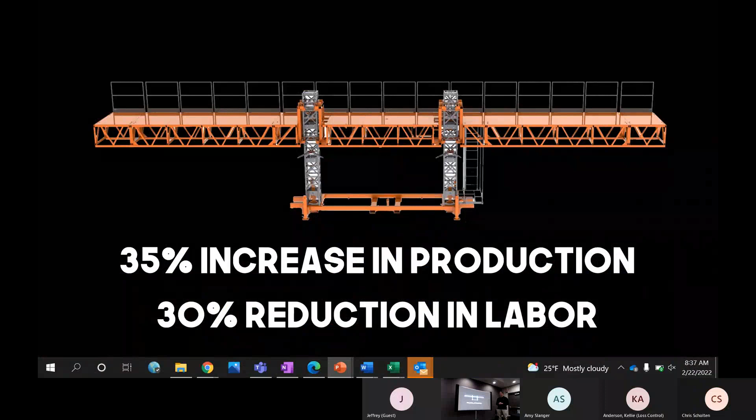The part that I'm most proud of, there were zero incidents and accidents when it came to scaffolding, and that's what we're shooting for, sending everybody home safe. That was a very high profile job with a lot of multi-trade, a lot of people working off of it. No matter what the topic was on that project, it was successful to us.

My name is Clint Bridges. I've left my cards back there, but for you guys on the webcast or through Teams, that's my contact information as well, my cell phone and my email. There are no bad questions. When we do training, I tell guys I don't care if you don't know how to put gas in it, there's no bad questions. Somebody put diesel in a Honda engine the other day, so it's no longer a joke.

MIOSHA is in the house today too, and I get a lot of safety guys who call up and almost get apologetic, trying to let down my defenses, kind of telling me we're not out to get you. We don't feel that way at all. You guys make us better, you make our job sites better, and we appreciate when you call, especially if you don't know. One of our mottos is, if you're not 100% sure, don't do. Don't know, don't do, and follow up. The fact that you guys call us to make sure keeps us off the front page of the paper and keeps everybody going home safe. So we really appreciate our working relationship, and we appreciate you guys.

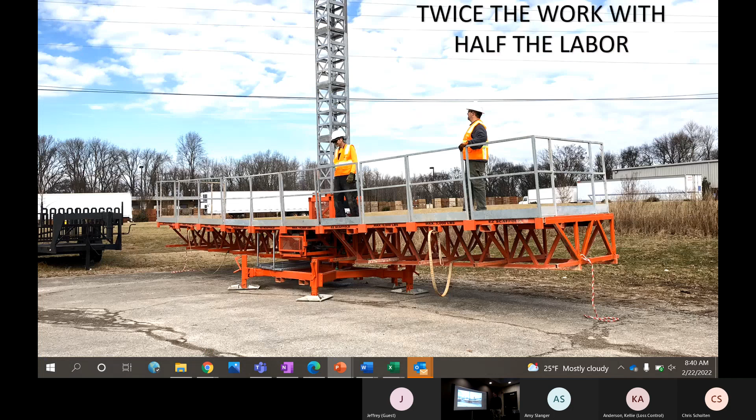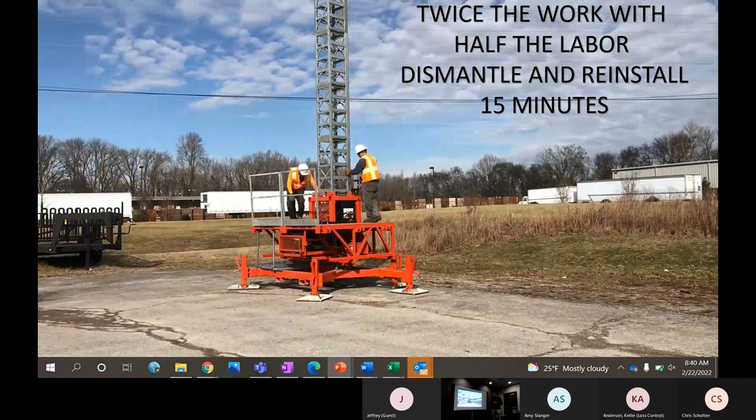This kind of gives an idea, just shows you how mast climbers go together. The thing that's going to be a little different is, I'm speaking in April at the state conference, the Michigan Safety conference. Because of that, I didn't want to talk in this meeting about the same thing I'm going to talk about there, which is going to be more about insurance and mitigation and stuff like that.

So what I'm going to direct this one to is the differences between a standard frame, supported frame scaffold, and a standard system scaffold, stuff that's supported off the ground, the kind of traditional type stuff. You guys are probably halfway familiar with that, probably have a lot of education with it, and especially if you have experience, you've seen it. So we've got to kind of relate those, there's a lot of similarities.

This is a supported scaffold. It is considered by ANSI and by OSHA a supported scaffold. So there are a lot of similarities, but there are also some differences you need to be made aware of. I'm not going to try to sell you EZ Scaffold as much as I'm going to sell you on mast climbers and the benefits of using a mast climber.

Maybe one of the big benefits is, what do you guys notice here? They basically built it all off the ground, not climbing up in the air. They put all the guardrail on, all the wallboards on, they get it all built nice and safe off the ground, and then it stays that way.

So you're working in a fall protected environment. It's much safer when it comes to that. Not to mention the speed and ease of putting it together and some of the labor savings as well.

I keep hitting the wrong button. And so...

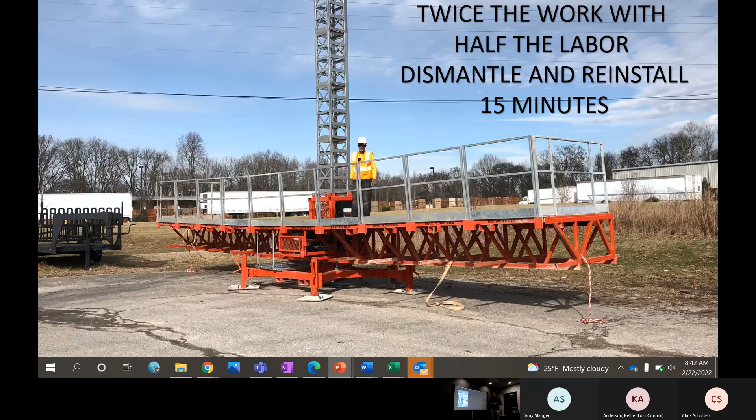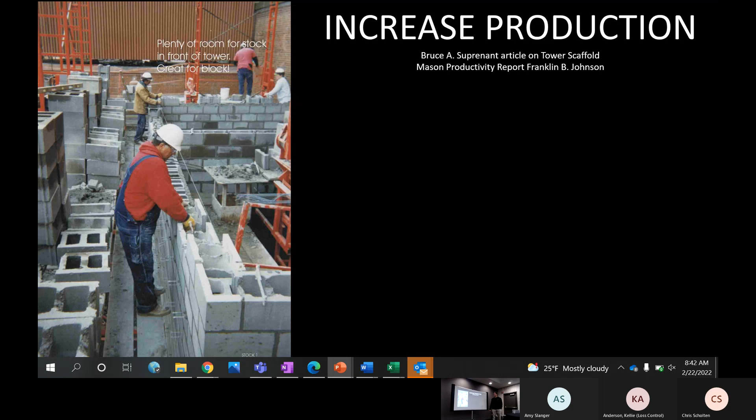You get an increase in production. There's an article by Bruce Suprenant based on a masonry productivity report by Franklin B. Johnson that shows maintaining a convenient work level minimizes mason fatigue. And that just makes sense.

We're kind of in a counterproductive industry. When our work's up here, our stock's down there. And when our stock's up here, our work's down there. I did it the other way around, but anyway.

So what a mast climber does is get you to the most efficient, most ergonomic level, and it cuts down on workplace injuries. The other thing it does is increase productivity. So it goes better. Not only is it better for the worker, it's safer, it's more comfortable, it's also productive.

It makes more money for the owner as well. The other thing about it, since you're right on top of your work, you're not sitting around, your quality of work is up.

Again, the 20 to 35%. Scaffold building and tear down is cut by 50 to 80%.

I kind of liken this to airplanes, and I'm going to talk about that a little bit related. When airplane accidents happen, most of the time it's during takeoff and landing.

And that's kind of the same thing with scaffold. Most scaffold accidents happen during the install and dismantle. When that scaffold's up there, you're inspecting it, everybody's watching, you've got more people working on it, that kind of thing. Tear down, it kind of becomes a free-for-all, and it has less inspection, less care and precautions are being taken. That's when the accidents more often occur. So cutting that down by 50 to 80% is huge.

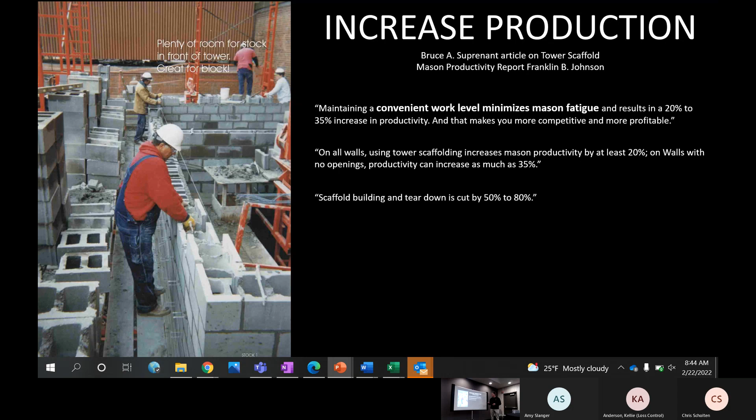One of the misperceptions or misunderstandings we get is guys want to know: when you build supported and frame scaffold, now I'm going to be held to make sure I'm staying up to date with my OSHA standards.

Well, it's funny, I always say that when I'm doing our safety presentations and training around the industry, I tell everybody this is for the state you're in. For the most part it's across the country, unless you're in Michigan and California. So now that we're in Michigan, things are a little different here. So you guys will have to hold me accountable.

So it does not fall under the ANSI code that requires a professional engineering design for heights over 125 feet. Mast climbers are designed to specific heights. They're what I like to call pre-engineered, pre-designed. For example, the EZ is designed for 550 feet tall.

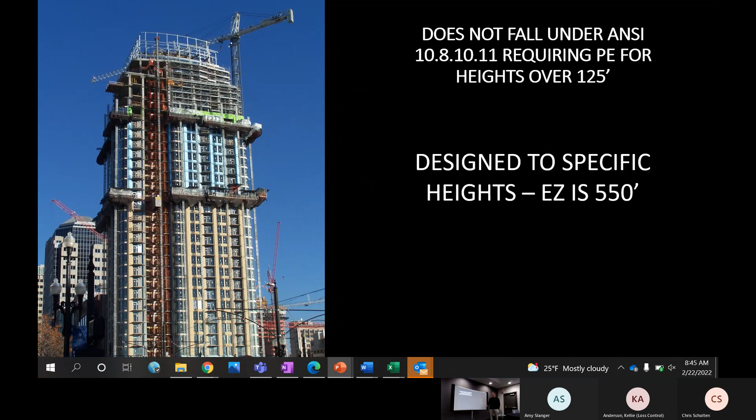However, we must confirm that the foundation can support the load. That's one of the things we need to confirm. So a lot of times we have to get a professional engineer involved at that point. It becomes job site specific. We look at the loads and we look at what it can support.

And sometimes it's just the ground. Sometimes we do need to build an additional concrete foundation, like they did here. Does anybody in this room know what size mud sill you're supposed to have on scaffold?

Yeah, that's a good answer. No, we don't know until you get out to the job. You're supposed to have a mud sill, and that's what it used to be for everybody. The mud sill is the plate at the bottom of the screw jack that spreads out the load, and it used to be 2 by 12 by 24 and 18-inch square. So you still get a lot of guys that say, oh, you've got to have this.

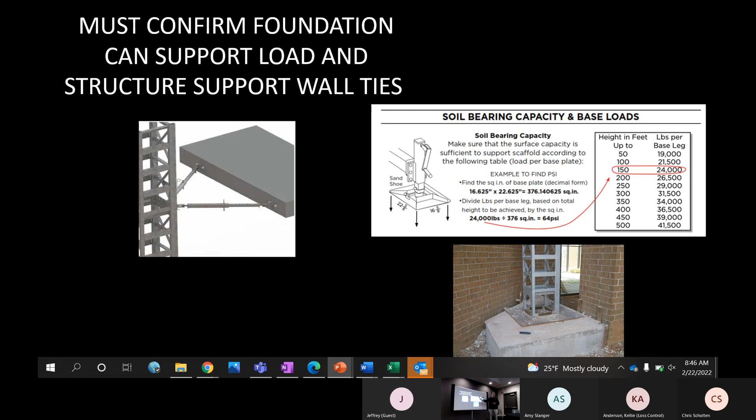So it's got to be sized to meet the loads coming down for the application and where it's being put. The other thing you want to do is make sure the structure can support the wall ties. The manufacturer will supply the ratings it has to go on.

So for you safety guys out there, if you want to find out if you've got a competent person, two really good questions for them are: can the foundation support the load? They go, yeah, it can support the load. Well, how do you know it can support it? That's the other important question. What work have you done to ensure that's going to happen?

They do soil sample tests. They know the PSI, they know the compaction of the ground. We know the load coming down on it. And then we're setting it on elevated slabs, roofs, stuff like that. Then we've got to look at that.

And then what freestanding height? How tall can the scaffold go before it has to be anchored to the structure? If they don't know that, chances are they're not your trained, competent person. And then at what height do you have to install those wall ties? And then from that point on, how often do the wall ties that tie the scaffold to the structure have to be installed?

Those are some simple questions that should be easily answered. They should at least know where to go get the answer if they don't know it, but they should know those off the top of their head.

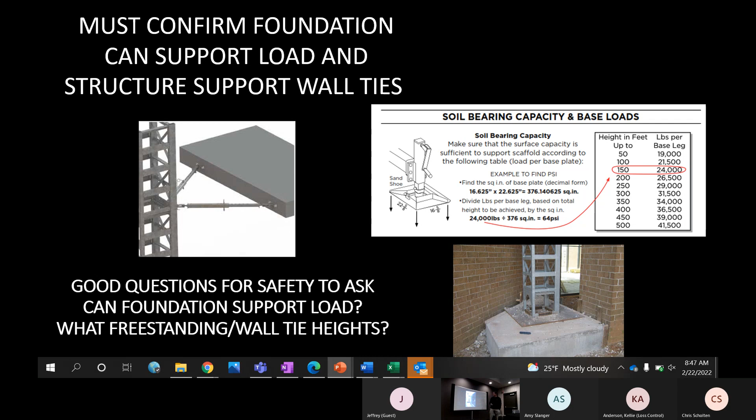Going off of a roof, again, you can't know everything about everything. I've been doing this, like I said, 27 years. I'm as well versed in mast climbers probably as anyone, and I know quite a bit about scaffold, and I thought I knew it all. And when I found out I didn't know it all, fortunately I didn't get anybody killed or hurt.

And so now, if we have our manual, we do our training. I don't know why I don't have a manual up here, but we say that's the Bible according to EZ Scaffold. So this is your Western Michigan rep, John Bowman, there, and he's got a manual. This is the Bible according to EZ Scaffold.

And we tell you, if it's not in there, you just don't do it. I don't care who told you that. I used to get that he-said-she-said all the time, where, your guy told me that I could do this. And I know good and well that my guy never said anything that's stupid. But it was probably more of a misunderstanding.

So our thing is, if it's not in here, you get it in writing. I don't care who told it. We have too many conveniences these days. Communication is too easy, we've got emails, we have texts. There's no reason, no excuse not to do it.

Power lines, electrical lines, are one of my big issues. I've been on two jobs now where the owner and general contractor told us that the power lines would be de-energized. Fortunately the utility company was doing their job. One instance we were working on the scaffold, the utility guy pulls his pickup truck up on the sidewalk, jumps out and starts yelling at everybody to get off that scaffold because they were live lines.

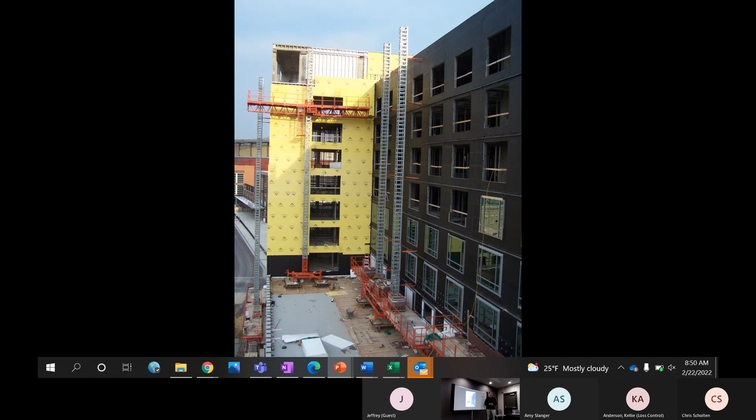Fall protection. Like we talked about earlier, we build it on the ground. Nice thing about it, you build it that way, it ought to stay that way compared to other types of scaffold where you have multiple levels and people are jumping up and down, climbing up and down, taking off guardrail and moving boards, that kind of thing.

If you notice with the mast climbers, most of them have pre-manufactured guard panels that have the top rail, mid rail, and toe boards built right in.

You know, people say toe boards aren't required. I'm really having a hard time finding situations where toe boards aren't required. My customers are going to hate me saying that in this kind of environment, but the fact is people are always walking underneath it. Unless you build a fence, that little red tape going around your scaffold isn't going to keep somebody out from walking underneath it. It might give you a little cover where you're not negligent, but unless you're building a fence, somebody's gonna be walking underneath that. So I have a hard time not finding a place for toe boards.

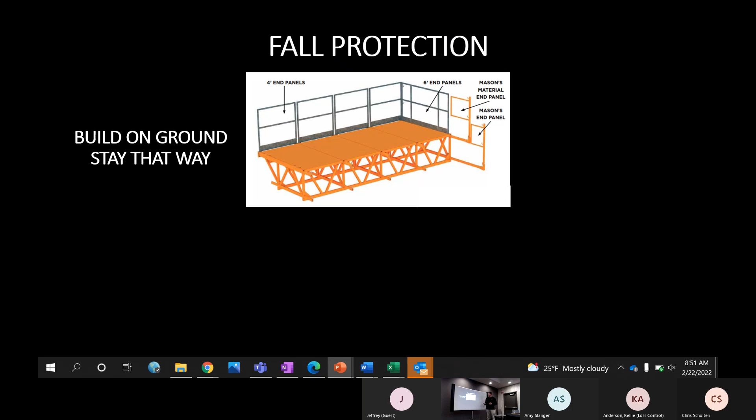The nice thing about mast climbers too is it's easy to inspect. It's all one level. With traditional scaffolds, frame scaffolds, system scaffold, they have multiple platforms, multiple planked areas, multiple guardrail, multiple people working in those areas. It's very difficult to inspect that and can require a lot of time. Where with a mast climber, usually you just have that one level, so you can see on the ground, walk underneath it before you get on it, and inspect it.

Like right here with this situation, you can see that there's just not proper board lap. Now anybody know - come on, you guys, safety - everybody ought to be able to tell us what's the proper board lap, what's the max and min? Six and twelve inches. And what can we do if you can't get that six-inch minimum? We can cleat it. Yeah, cleat it. The number one way people get hurt on scaffold, most often scaffold fines, is boards.

So making sure that we have good boards on there takes care of the majority of the accidents. And that's one way we make sure people are going home safe.

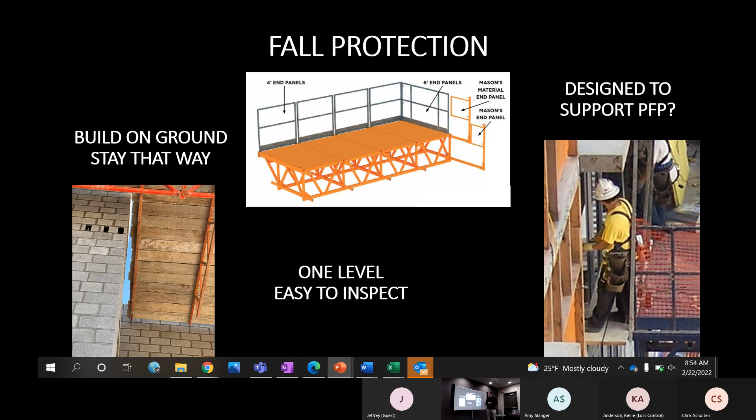And the other thing about rat lines is you got multiple guys hooking to it usually and running up and down. So unless that engineer has been doing it that way for 30 years, it doesn't matter. Unless it's been engineered and designed, you just don't do it. Everything on the EZ, the tower, anything structural on the EZ has been designed for an anchor point. Now you got to look at the circumstances. One person per anchor point. You have to read the instructions. It's more than just everybody hook up. You got to know the machine specific instructions for that.

Falling object protection. One thing about system scaffold and frame scaffold is it's real easy to build falling object protection. You'll have a level above you, a level below you, and that kind of thing, so that can become less of an issue, and you can also wrap the outside of it. With mast climbers, because they're moving all the time and usually open on top, usually one level, you don't have that luxury of having a level above you. So we do have the ability to put a diaper on the scaffold, which is real important in high traffic areas.

You're working downtown. This job, I'll show you a picture of it later. Is anybody in here Latter-day Saints? This is in Salt Lake City. It's the second tallest building in Salt Lake City.

When they first moved there, they built the tabernacle, and they had a rule, this is the way I understand it, so I'm giving hearsay, so now that I'm on camera, maybe being recorded, I can say nothing could be, no building could be taller than the tabernacle. Well, it wasn't very long before they found out the tabernacle wasn't that tall. So then they built the church office, and it's at 420 feet. They said no building can be any taller than 420 in the state of Utah. This one is 410. It's actually owned by the church, and it's directly across from the tabernacle, I've got a picture of it later, it's more impressive. So those are some high dollar condos right there looking down on the tabernacle.

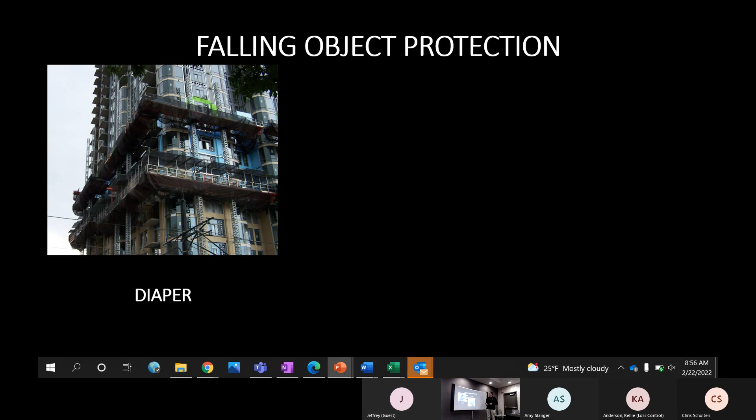We can also do falling object protection, overhead protection, and so we can build that into it. Anybody been to Nashville and seen Printer's Alley?

Printer's Alley used to be the seedy area of town. It's where you didn't want to tell people you were going. Matter of fact, this hotel right here, this building had been used since the 1930s, and it used to be a house of ill repute. The only way they got in there was a dry cleaner across from the legislature. They had a tunnel that went from the dry cleaner up to the house of ill repute. So that may tell you something about the legislature at that time.

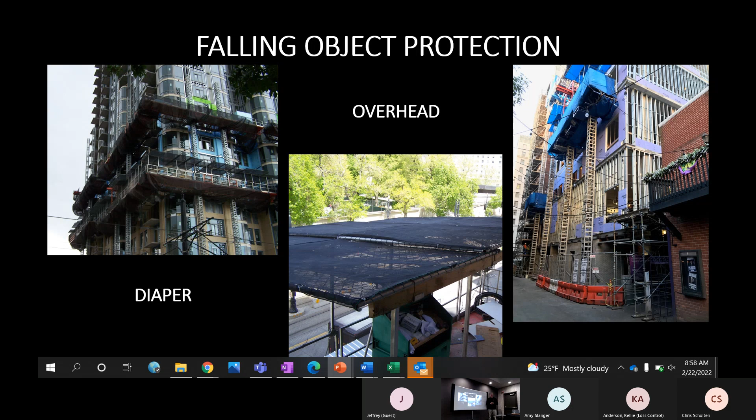But now it's a tourist area, and it's a hot tourist area in a hot tourist town. And because of that, we had to leave that alley open, not only to deliveries, but to tourists. So we buttoned that scaffold up very nice and tight. And the funny thing was, I was never out there. Not really funny, it's funny ironic, not funny haha, that something did fall off that building and land close to me. Now, I don't think it fell off the scaffold. I actually think people were throwing stuff off the building at me.

But I was never so glad to see a scaffold get off a wall as I was that one. So, we do have the ability to build up a nice, tight, fall protected area, or falling object protected area. Capacity of the machine.

So there are different types of machines. Just because it's a mast climber, we'll get into the machine-specific training here in a minute. The machines are designed for different capacities, like this one's designed for 25,000 pounds. This one is designed for 1,100.

Again, we talked about knowing what the foundational hold is, knowing how often you got to tie it off, knowing what the freestanding is. Another good question is, what's the capacity of that machine? And if that guy's scratching his head and doesn't know what it'll hold, or says it'll hold a little bit over 20,000 pounds, or it'll hold a lot, those are not good answers. That's how you're going to find out whether your competent person on site has been well trained and knows what he's talking about. So knowing the capacity.

And it's not only the total capacity, it's knowing the location. As you can see, this machine has a 25,000 pound capacity. A lot of times with frame scaffold, you have a uniform capacity because the supports are along the wall at uniform spacing. Where with the mast climber, your support's coming off those masts. So knowing what the load is and where it's located on the platform is important as well. I'm obviously not going to put 25,000 pounds out here, but on this one I could put 5,000 pounds on each wing or cantilever deck. It also falls into distribution, knowing how you have to distribute the load.

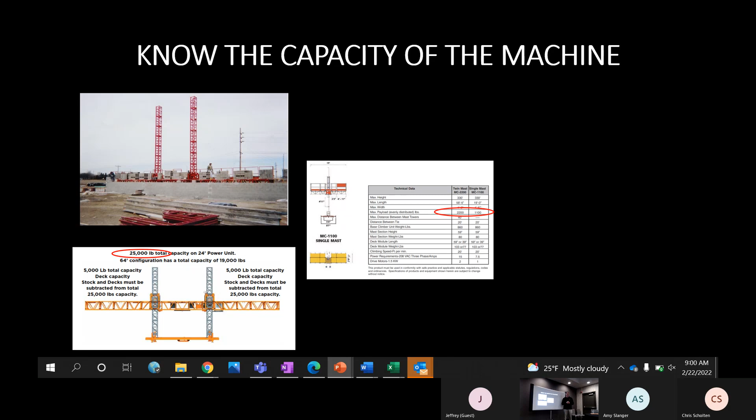So it's common sense. A lot of people say we don't have common sense anymore. I get that all the time. Well, you might as well get off this job because I don't think it's a common sense thing anymore. I think it's just apathy, kind of a lazy thing. And it may be because it used to be we didn't have safety guys on site, we were responsible a little bit more for our own safety. So we used our heads a little bit more. Now we got somebody else to blame and somebody else to take the responsibility. So a lot of guys just don't do it. But enough of my politics there.

The other thing about mast climbers, a lot of times they have a different type of deck, a metal deck, a diamond plate deck, stuff like that. That has a higher pounds per square foot rating most of the time than a wood deck. So understanding the mast climbers and machines you're working on, that's going to be different than a wood deck framed scaffold.

The other thing we talked about is scaffold plank being the number one way people get hurt on scaffold. And I don't really believe that's the number one way, even though we say that all the time. Statistically, that's the number one way. The number one way people get hurt on scaffold is education — they don't know. And that's why we really appreciate you guys coming out there, making sure the people on there are educated, making sure they know what they're doing, and leaning on us for that. Really, the more educated they are, the less likely we are to have scaffold accidents.

But statistically, the boards are the issue. So we have a lot less boards on this that we have to pay attention to, because we have a nice diamond plate deck that's welded down, and we only have to look at a couple of boards. So it makes it a lot easier to inspect and safer as well.

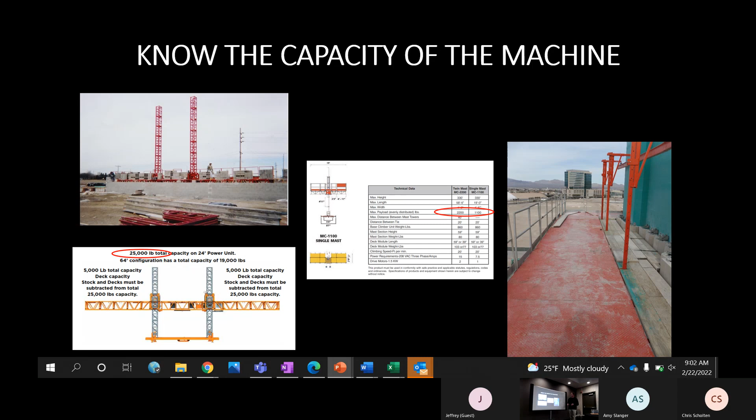One of the questions I get is whether I can load it up, run it up, and transfer material into the job site. It looks like an elevator, it has the same characteristics of an elevator. I run that platform up and down all day long, so people want to say, hey, can I load it up with furniture and transition that furniture into the building, or building materials, whatever? And it's not allowed to be used that way.

That's what we call a transport platform. Anybody in here seen a transport platform on their job? A transport platform is kind of between a mast climber and a buck hoist.

It could be set up and operated kind of like a mast climber, but it can be used like a buck hoist for transporting personnel and material. Mast climbers cannot be used like a buck hoist or transport platform. The only time you can transfer material from a mast climber to the structure is when you're doing the same work. For instance, going back to masonry since that's what I grew up on, if I'm laying brick on this wall and I have a pier or inset to lay off of on that balcony, I can take the brick from the mast climber, put it on the balcony, and throw a shovel full of mud, transferring the material from that point. What I can't do is take it to the ground, load it up with furniture, refrigerators, run it up, and transfer it into the building.

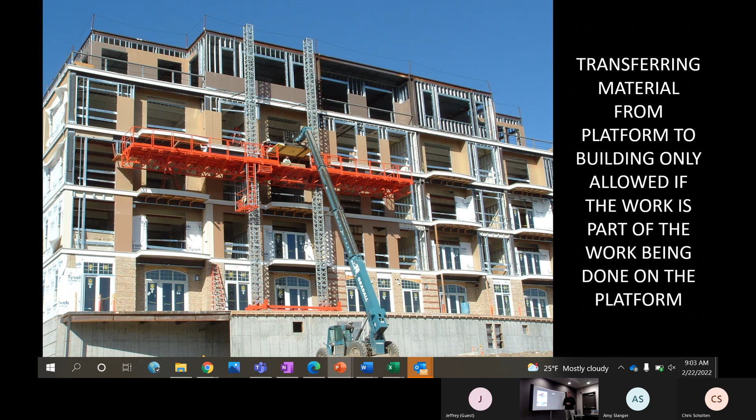Yes, sir. I have so much to talk about, but I'm not going to because we're doing a wonderful job. We have a question and answer at the end, so... Well, I can hold it till then. No, go ahead.

I'm wondering why you can't. Well, it's a great device for lifting up a certain amount of weight safely. That's a very good question. It seems like a safe way to move some material using transport platforms or a mast climber. That's just a whole lot safer to transfer material. They're designed for it, and that's the thing.

If you ever get a transport platform on that job, they're relatively new, probably around for the last 10 or 15 years in the United States. You definitely want to look up that standard, I think it's ANSI A92.10. But anyway, find out what makes the transport platform different. What makes it different than the buck hoist? What makes it different than the mast climber?

They have things like built-in gates that shut the whole platform down, built-in ramps with guardrails, and access off the back that when that gate's open, it shuts it down. When it hits 10 feet, it has to shut down for 3 seconds before it can continue to go down. So a lot of things that mast climbers don't have make it a safe form of running it up and down. We can actually convert our mast climber to a transport platform because it does have the same characteristics.

But one thing you don't want to get on the job - we see this a lot, guys get away with it a lot - is that they'll just use the mast climbers for doing that. You just don't have that safe transition. You can't depend on somebody else to design that. You want to make sure that comes from the manufacturer.

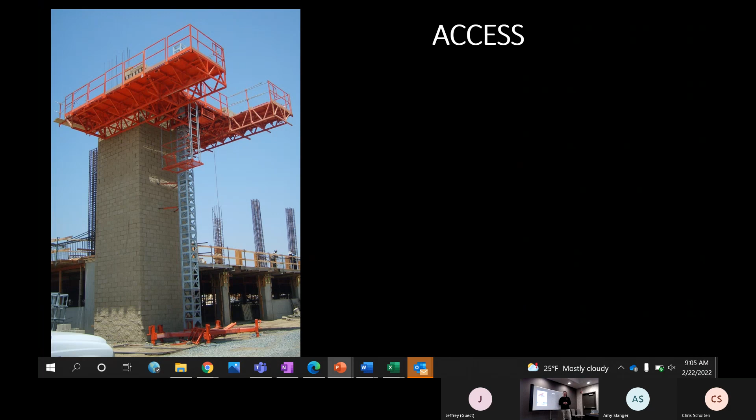Access, going back a little bit. We manufacture everything that's orange to be legal to climb. We do that for a reason, because people are going to climb it anyway, so we might as well make it legal to be climbed. It's what they call an integrated scaffold access frame. You can see the side of this tower looks like a ladder, and that's the purpose - it's meant for you to climb and use for access.

So you want to make sure it's legal to climb. The other thing you want to make sure - let me get back to my access point. Now I'm realizing why I did the animations in that sequence. Remember we talked about the number one way people get hurt on scaffolds - boards. Number two is access: how are you getting on and off that scaffold? Having a safe way to get on and off that scaffold is vital. I probably have more people get hurt climbing on and off scaffold than from boards. It's really close, so make sure that you have safe access. It's really vital on that job.

So if it's legal to climb, you want to make sure that it's also legal to access. The problem is, it's legal to climb a tower nice and safe until you get up into this area, where you have all those obstructions in the way, and it becomes dangerous to climb around all that to get on the platform. So we have an access platform: you climb the tower, flip open that trap door, step out, and there's another ladder through a trap door that gives you safe access to the platform.

Those trap doors are kind of my nitpick, whatever you want to call it. But there is - that's a huge fine. That's a huge violation if you ask me.

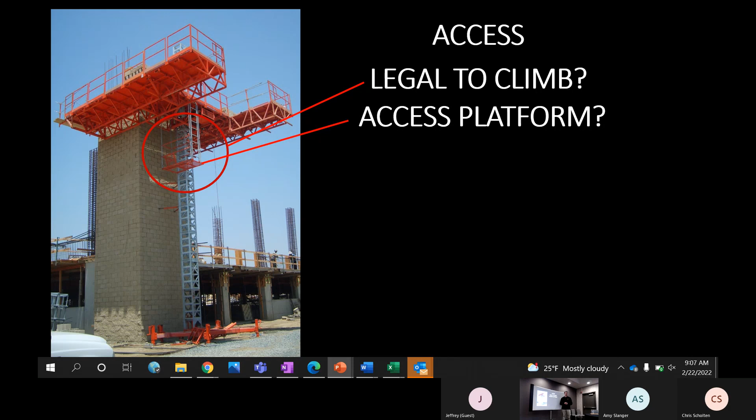There is no good excuse for leaving the trap door open on that access platform or that other platform. Guys will say, well, we were all coming up. If you want to stay there and wait till your buddy gets up there and open the door for him so he doesn't have to mess with the trap door, that's fine. But you close it. What happens if he gets halfway up the tower and says, oh, I forgot my lunch, and goes back to the car? I've got an open hole there. So I really hammer that home. That's my pet peeve. No open trap doors. The minute you walk through it, you keep it closed.

Then, whether a rest platform is required - what's the ANSI requirement for a rest platform? Anybody know? I know it's 35 feet nationally. Is it 35 feet? Yeah, so it's 35 feet in Michigan. Understanding that, EM-385, Navy, military jobs, they're 20 feet. A lot of industrial situations go below that. You've got to have 100% fall protection while you're climbing. So understanding where you're working - are you working in California? Are you working in Michigan? In industrial situations, a lot of general contractors have their own regulations.

It's really important to know the regulations of where you're working. Everything I'm telling you is for a nice sunshiny day in America. We'll get into some of the other instances where weather changes that as well. But whether a rest platform is required - you cannot climb a tower more than 35 feet without having a place to stop and take a rest.

If you have an emergency situation, a medical situation, this is the one trap door I will let you keep open, because the majority of the time you're climbing right through it. And if you need it, the last thing you want to do is go messing with the trap door - you want easy access to that platform. So I will give you a pass on leaving that trap door, and as a matter of fact, I recommend leaving it open.

After about 35 feet, that's when people are going to kind of quit climbing a tower - you're going to look for access in and out of the building. And when people say I'm climbing in and out of the building, that's when you want to know how they're getting in and out, having that safe transition. A mast climber, again, because it's elevating, because it's moving - it isn't like a frame scaffold where I've got that permanent access set up. Can't always build a stair tower next to it that gives safe transition from those stairs to the platform.

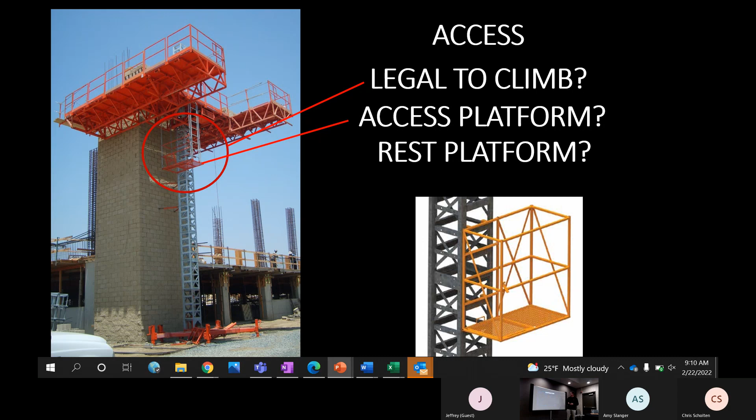Scaffold plan. A lot of GCs and a lot of owners and safety personnel are requiring a scaffold plan now. It's getting extremely detailed - some of them want to know exactly where you're pulling your trailer, how you're unloading it, how you're keeping your people safe while unloading it, where you're stationing equipment, not to mention laying out the scaffold, wall ties, foundation, stuff like that. So scaffold plans are becoming quite prevalent. Because of that, we've kind of got a fill-in-the-blank kind of thing to help assist them with that. It's not the end-all-be-all, but it is the system. So a scaffold plan confirms that you've got the right equipment for the job.

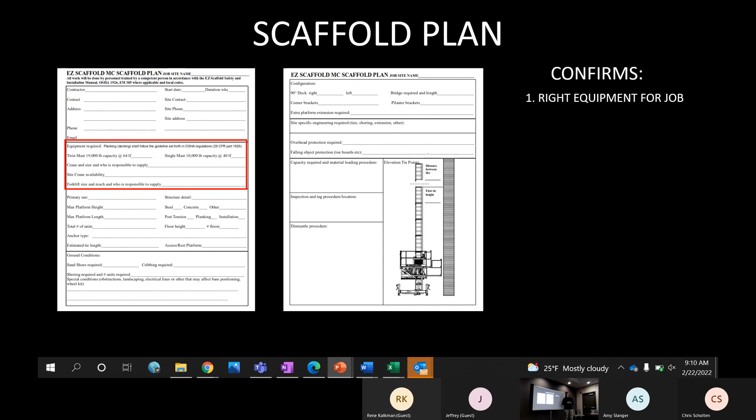I kind of sound like a scaffold salesman when I say this, but the worst thing is to not have enough scaffold. It's very unproductive if you don't have a place for your guys to work. Making sure you've got the right equipment for a job - not having it can be really counterproductive. If you bring out scaffolding that isn't right for the situation, you may get the work done, but you're not as efficient as if you'd brought the right equipment, much less it could be a little more dangerous because you're using the wrong equipment just to get by. So the scaffold plan helps you confirm that ahead of time, along with any site-specific issues - wall ties, what the structure is built out of.

Is it steel? Is it concrete? How we're anchoring, how many wall ties we have to have, how often we're tying off. Do we need to have access platforms, stuff like that. And then the foundation as well. What are we putting it on? Again, you want to confirm that.

This kind of comes back to where the competent person, the last person in that checklist, is that competent person. We did a job down in New Orleans and they said, oh yeah, you could put that scaffold right there on the city street. And I don't know if you guys know much about New Orleans, but it kind of floats. And you can put it down there on that city street. So it's fine, it's designed for it.

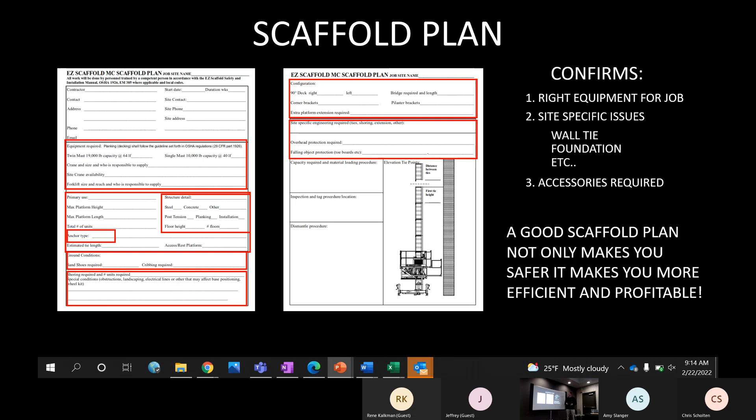Well, the iron worker put in all the canopies, and we get that all the time. The iron worker, oh, I won't put them up. You come out there, you put them up. But anyway, these guys did not put a scaffold plan together. So they're calling us up scrambling, saying, hey, we need help.

Not to mention that we started in a 2 to 3 day hold. Job starting off right off the bat in a hold because we didn't put that scaffold plan together.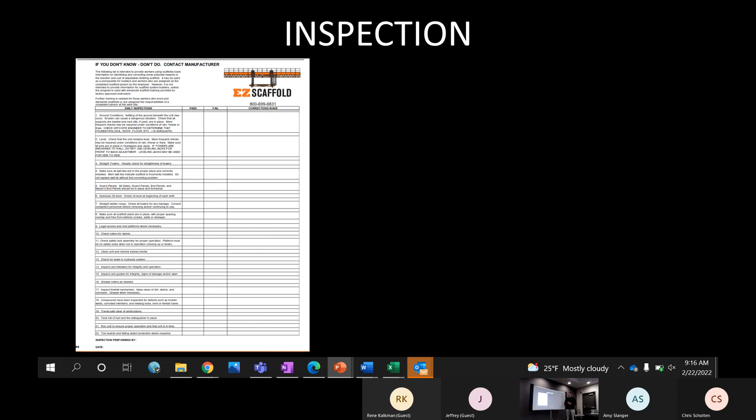The inspection. You can see how extensive our inspection sheet is that we put in the back of our manuals. So it goes back to, you're required to do a daily inspection on the scaffold you're working on. The way I read it, I almost think you're required to use it every time that you have to come back to it. If you leave a scaffold, you lose control of it. So if you go to lunch, you should come back and re-inspect it. That's the way I look at it, but at least have that daily inspection.

Scaffold tags - I don't know if MIOSHA requires them, I don't think that they are. That being said, they are a great idea, also great for covering your liability. You red tag a scaffold, nobody can get out on it. If somebody gets on it, you did red tag it, so you don't want anybody using it. It's a good thing to recommend to your customer to have a good tag-out program in place.

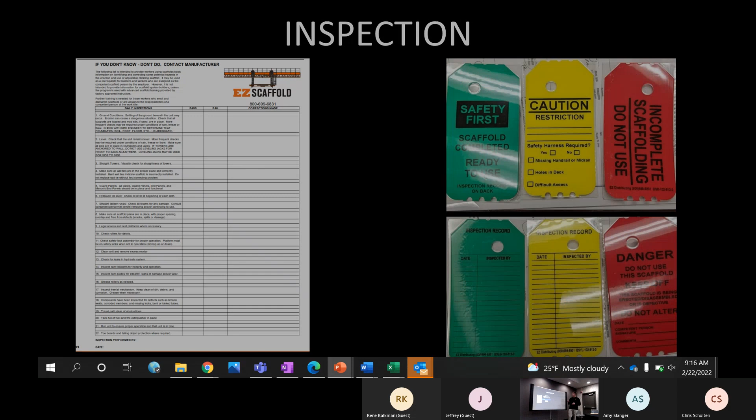Certification - there are some great organizations, like you guys, not to mention the Scaffold Association, IPAF, International Powered Access Federation. They have good programs for scaffold and mast climber orientation, and they do a great job of it.

But the one thing about mast climbers is, when it comes to competent persons, installers, and users - we don't call them operators, that's a bad thing, because then you start looking at operator cards - users running it up and down have to be trained by factory trained personnel, machine specific. They're all different, so it's great to have a good orientation about the use of mast climbers, and it helps you ask the right questions, because once you understand the different characteristics, you know what to ask. But if you're jumping on that machine, you need to know specifically what it's designed for, so you need machine-specific competent person training.

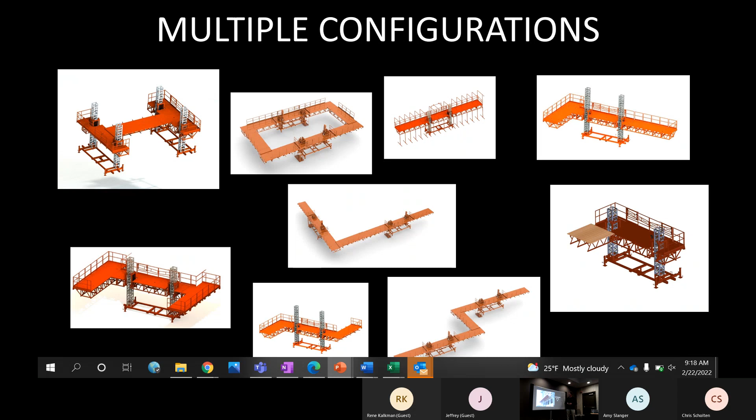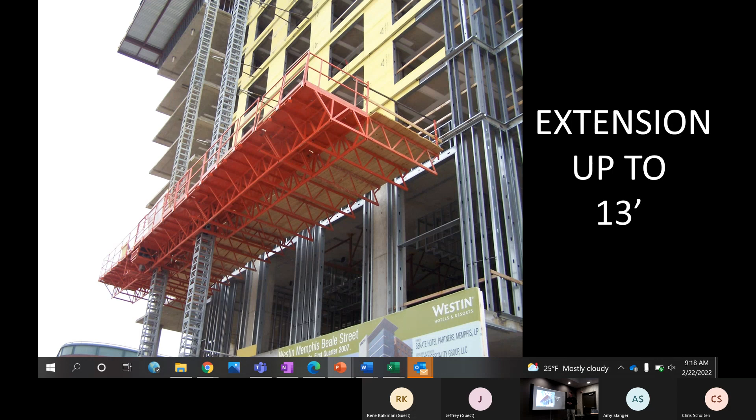You can see the different mast climbers have a great structure there. A lot of them are really built heavy duty, so you can do a lot of different configurations and make difficult situations safe. Like I talked about before, this is that same job, the Westin off Beale Street, where they had canopies in the way and we had to reach out over it. We can extend out up to 13 feet off the front of that scaffold, so we make those really difficult situations relatively easy.

Again, you can see that one right there where they reached out. The cool thing about this one is it started out tight. We went with longer platform extensions - we call them platform extensions, people call them outriggers - that hold your boards. Then we went with longer platform extensions with brackets to help take that diving board effect out of it. Then we actually went into the trusses and put platform extensions out there that extended past there, so it was actually pretty close to 13 feet on that very end, making a cut up little area and we were able to do it.

We're also able to turn 90-degree decks with our standard cantilever decks, so we can extend off the front and off the back for turning an outside corner or an inside corner. In this situation, they had all this obstruction in the way, so it would have been very difficult and expensive to build a scaffold around that obstruction. We were able to just turn that 90-degree deck, hang that deck on there, and reach out over it - so we did a lot of cut work.

People have the connotation that mast climbers are great for tall, straight walls, but if things got cut up, or it's just a short wall, a mast climber's not meant for this job. But you can see how when you can reach out off the front like that, and turn those 90s, that cut up work becomes much easier to do, as well as safe, because it's designed to do it.

And then you saw in that picture at the beginning, we can set up a 72-foot platform, 40-foot tall, off the truck with a guy on the forklift and me on the ground, and have it set up in less than an hour. I can take it down from 40 feet in the air and move it in about an hour and a half.

So now I'm doing those cut up jobs. I've got guys that put them on a Kentucky Fried Chicken - they'll send one guy, he'll put that scaffold up, stock it up, and have it ready to go. So it just becomes much more productive.

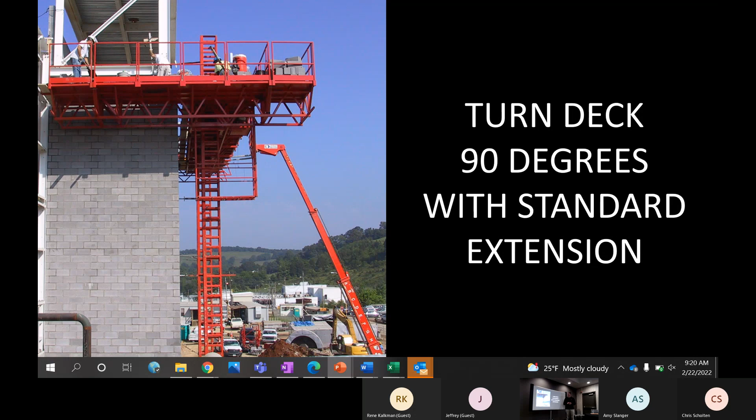We have a monorail for it, where we've lifted as much as 3,000 pounds of pieces of stone with the monorail.

I'll show a better picture of that. That's in Biloxi, Mississippi, on the courthouse down there. But the thing about the monorail, when you're setting these size pieces of stone, most of the time people get a crane out there, and you either have multiple cranes, or one crane and one team setting it one piece at a time. With the monorail, we're able to have multiple teams up there setting at the same time, so it really increases production when you have more people working in different areas and doing it affordably.

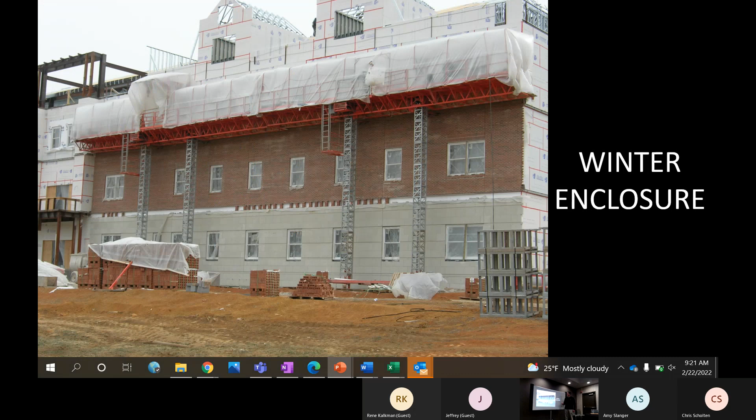The other thing I like about the monorail is I'm not flying stuff overhead with it. You see where he's at right now, I'm not going to have stuff flying overhead, so it keeps it a little bit more controlled as well.

Quick question: how high can that monorail system be mounted, as far off the platform? The most we've done is about 10, 11 feet.

We are a manufacturer, an American manufacturer, so we do a lot of custom stuff. We don't charge our end user for the engineering and design, only for the labor and what it costs us to build it. A lot of stuff that was custom, after we put it out there and people said that's a good idea, became a standard part. The other reason we don't charge is we want you calling us instead of doing it yourself or having to scratch your head. We could probably do more, but standard, we've gone about 11, 12 feet above our work.

Another question: the monorail system, is that something that can be used on the EZ Scaffold as well as mast climbers? Is it the same type of system that would work on both, or does the mast climber have its own monorail and EZ Scaffold its own? Well, the EZ Scaffold is a mast climber, so the mast climber is one of the products EZ Scaffold makes. We have EZ Scaffold mast climbers and we have EZ Scaffold crank up.

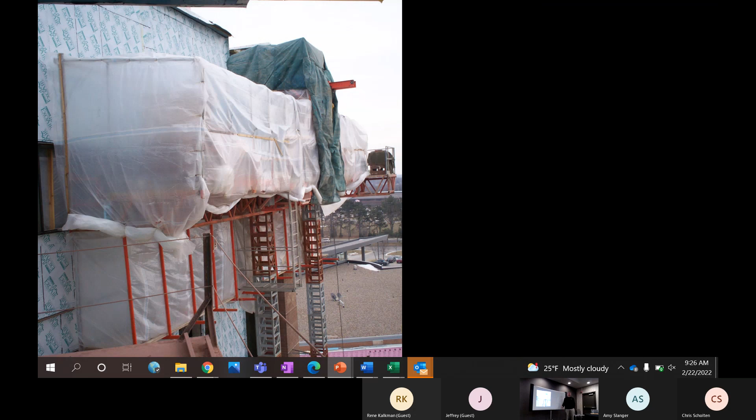We also have the ability to enclose below us as well, so we don't have to drape plastic all the way to the ground. A lot of times you've got work below you that you have to keep warm for a certain period of time. If I was only enclosing the work platform, I can only do so much and I'd have to stop. So this allows them to keep working and keep their work heated.

The other thing we do a lot of times, we'll put the heater down there so it keeps it off the deck. We work in Minnesota in 20 below temperatures, and guys tell me they'll quit working after 20 below because they start blowing hydraulic lines and things like that. But they're working at 20 below.

A lot of times you're in there and guys will be in t-shirts, because you wouldn't think that little bit of plastic made a big difference. But when you're working, it becomes pretty comfortable. So that goes up with you as well. When you put the heat on, we can build a platform down there and put a heater that feeds it.

Is there ever a concern of fire? Oh, fire is always a concern, yeah. That's like any other scaffold when it comes to heating and what you're putting on there. That's one of those things that doesn't change between platforms.

Now do you use a regular propane heater inside of that? To be honest with you, on the heaters I'd be stepping out of my bounds if I went too much into what type they use. But of course you've got the ventilation—a lot of times we run ductwork, stuff like that. So that's always something to take into consideration.

Now, do you guys have deck heaters that attach to the lower portion of the diamond plate to keep the deck warm? No, on most of it, if you see what they're doing now, a lot of times we'll go ahead and wrap underneath that deck because that diamond plate gets cold, and you start looking for 2x10s and stuff to stand on.

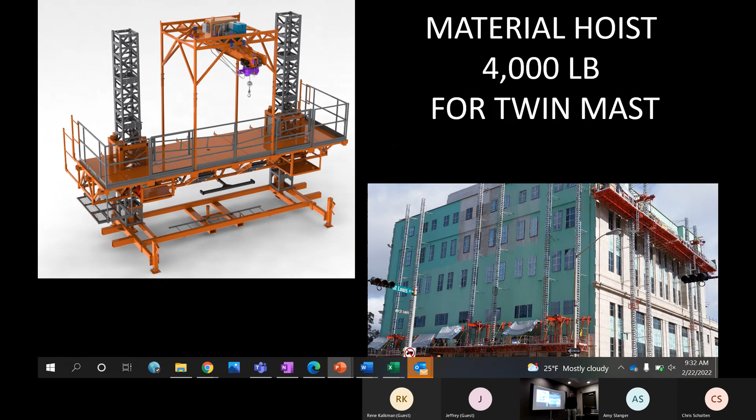The other thing I talk about with crane accidents relates to how it connects with scaffold accidents and airplanes. I saw an inspector in an interview once, and they asked him what caused this plane accident. He said it wasn't one thing, it was about 4 or 5 things. He said he'd never investigated a plane accident where there weren't 4 or 5 things that caused it. I thought that's ironic, because that's exactly how it is with scaffold. I've never seen a scaffold incident or accident where there wasn't 3, 4, 5 things that caused it, and maybe if you would have done that one thing right, it would have prevented the other 2 or 3 things from causing an accident.

My guys will call up all the time wanting to cut corners - at least they ask me first, can we cut this corner, can we cut that corner. And I say, why would you knowingly want to cut a corner when there's 2 or 3 things you did wrong that you don't know about? So always do it 100%, as much as you can, do it right instead of covering up the things that you did wrong.

This is the other building. If you're ever in Las Vegas and it gets hit by a tornado or hurricane, or more likely Armageddon, this is the building. It's the Smith Center for the Performing Arts in Las Vegas. Again, solid CMU to the top, heavy stone all the way around. We had the monorail set up for laying all that stone, and this is my favorite setup.

I think it's our most profitable setup and our safest setup for making a difference in a configuration compared to alternatives. We set a power unit on this side, a power unit on that side, and we drop a bridge in between from the front of one to the front of the other. We chain it down, lock it down so they're all tied in together. I've got a nice diamond plate deck all the way around, and it stays easy and fast to set up, all the way up the wall. So it's a great way to set up elevator shafts and stairwells, which I'll show you.

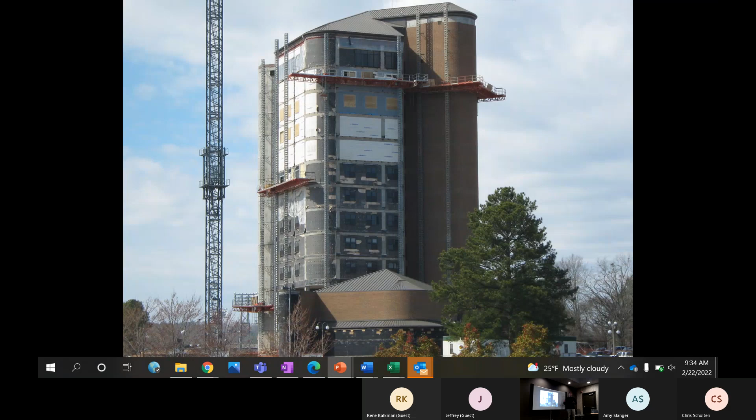You have to get off scaffold, just like regular scaffold, at 35-mile-an-hour winds. You can't work off the scaffold. The scaffold is actually designed for 90-mile-an-hour winds, so we're not worried about the scaffold falling over. We're worried about you falling off the scaffold and what you're working with being blown off. Kind of the rule of thumb, if you see the guys coming down from the crane, you've got to get off that scaffold too. But it's 35-mile-an-hour winds, and we're probably one of the only people that actually field tested that.

We just finished setting up this job stripping the brick off and putting new brick on this building, 220 feet high. It took a direct hit—you guys remember when all the tornadoes came through Alabama? There were like 9 or 10 in one night, hit the University of Alabama. Well, this building is in Hanceville, Alabama, and they took a direct hit from it. It was just a category 1, so they figured around 100 to 105 miles an hour. The crane looked like the Leaning Tower of Pisa, they had to get another crane out there to tear it down. One of the buildings down below actually moved 6 inches, but the scaffold was fine.

We took it completely down, inspected it, and put it right back up. The guardrail looked like spaghetti, the boards looked like toothpicks, we had to replace a lot of wall ties, stuff like that. But the scaffold was fine. So again, 35 miles an hour—you make sure that scaffold's set up right, make sure it's being used right, keep a solid foundation, keep those towers plumb. She's not coming down.

That's the wall ties—one thing I didn't mention earlier is that's what we use as an indicator something's gone wrong. I had an old man tell me one time, if you ever jump on a scaffold and it doesn't move, you better get off it. Everybody says, oh man, that scaffold feels good, it's nice and tight. But when it's nice and tight, something's in a bind. The scaffold's designed to have a little movement and flow into it.

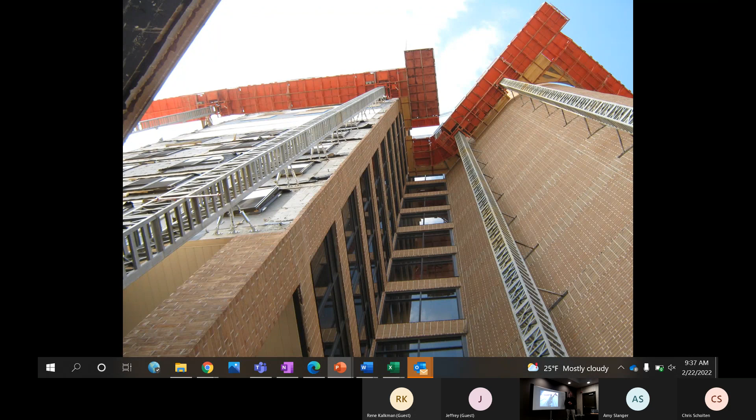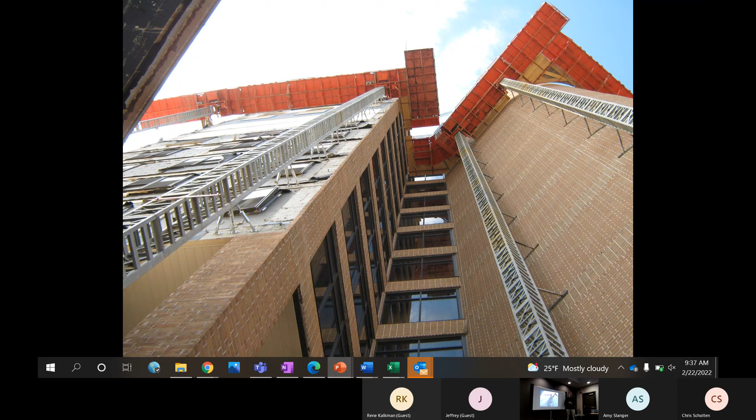If you're going up high, you better start securing where you get those winds, if you're in high profile, high traffic areas, stuff like that. And that's why you inspect those boards every day. Every time you get on that, first thing I do is look and make sure I get a good board lap.

That's a good question. I do think we're headed that way. I think MIOSHA already has some standards involved as far as securing board lap that are a little bit more strict. You mentioned toe boards - we are way too lax on enforcing that, and that will change.

Not because of me, but because of our enforcement folks and who runs that. But yeah, tying boards down or making sure they're cleated - we're a little more lax, I think, in enforcement than we should be, but I wouldn't count on it. That's going to change. There are two things I think are coming: tying down the boards, and then the other thing is the leading edge for bricklayer.

But wouldn't that be great if we would just clamp those boards? There's quick clamps to do these things - we make clamps. Bang, clamp them down, that's done. So you can do it. It's out there. It's not that big a deal to get it done. So I think there are a couple of things that are on the cusp of happening sooner or later.

That's always, like I said, that one building where I'll show you that picture in a little bit. So you see how we have the different configurations doing the 90-degree deck. We actually have a 45-degree deck as well, so we have that structure there. We can do a lot that you just can't, or is more difficult to do with other types of scaffolds. So we can take a difficult situation and make it easy.

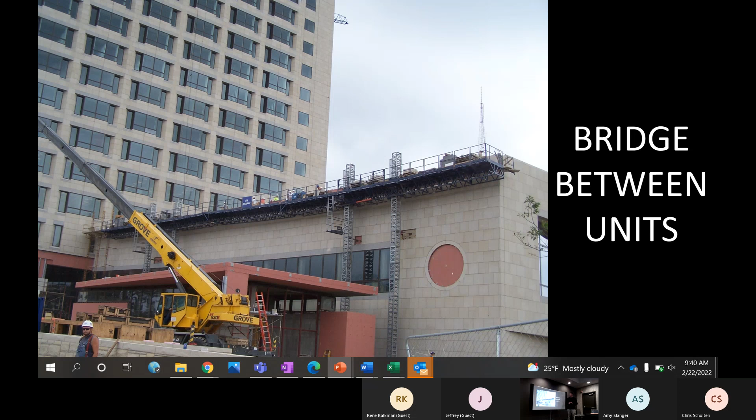Can anybody look at this picture and tell me the problem with it? What's about one of the first two or three things that you're going to be looking for when you're inspecting a scaffold? You can't inspect the bases. There you go.

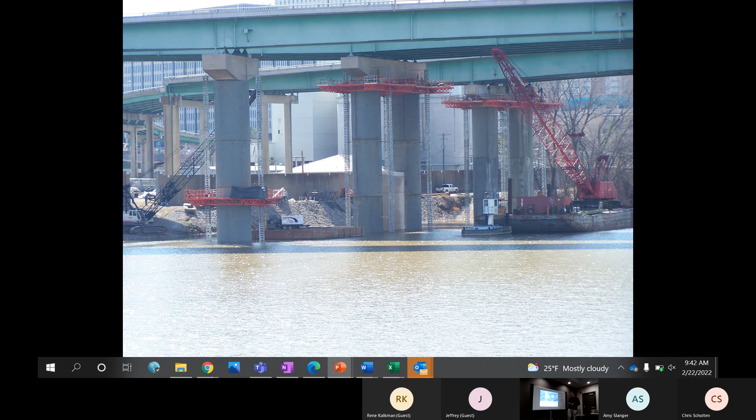And you can kind of see how we bridged around there and the work that they were doing off of that as well. Don't get too picky on, they have harnesses on.

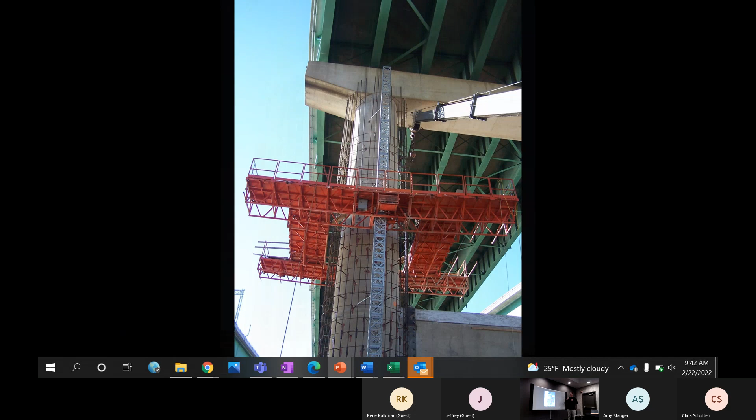And everybody's going to work that one. But again, this goes back to doing everything right. I haven't been working on that. I did go over that, didn't I? I'm sorry about that, so I'll wrap this up pretty quick.

This goes back to doing everything right. They did the wall ties right, they did it loaded right. And so we were able just to shore it up, go back, inspect it, replace the wall ties, and kept going. We didn't even have to tear the scaffold down, but more importantly, we didn't have an accident.

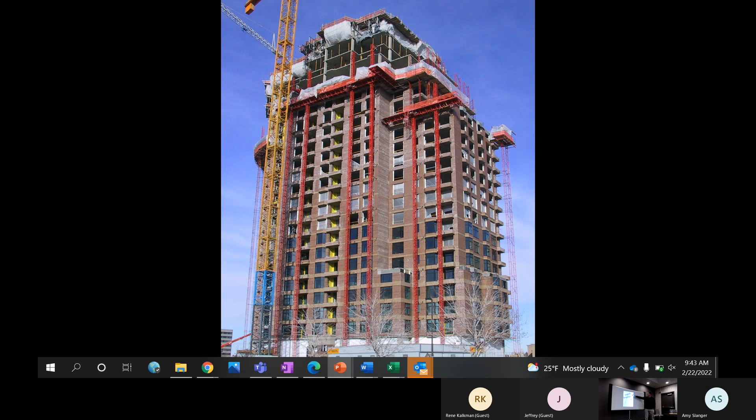So buzzing through these, I guess we kind of did the question and answers a little bit. But the fallen object, this is that building in Salt Lake City. We had multiple levels, the mason was working on this level, had his mixer on there, his sand, mixed the mud, and then we had other trades up above them.

So of course we had to put falling object protection on there as well, so we could put 2 platforms on one scaffold. And what really surprised me was the capacity. I thought we were going to be handing brick through the window, but what worked out, because we didn't overload the base, the engineering came back, he could actually have a really good working load on that. And then we had to keep it where both platforms weren't between the same wall ties. So we did have some other precautions to take, but it's a really neat setup.

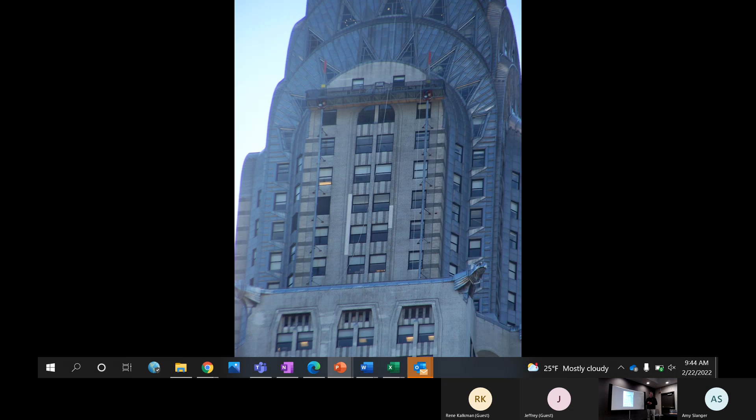This is the Chrysler building. You guys seen Men in Black 3? Where they're jumping off that eagle right there and going back in time, that kind of thing - that's where that eagle is, Chrysler building in Manhattan. And again, having the right scaffold for the right application.

We had to bring this scaffold up a freight elevator, roll it down a hallway, through a doorway, and out onto that ledge at 600 feet in the air, and build it another 150 feet tall. I wish, I don't know why they do that.

I've got a picture of them doing this work back in 1929 with frame scaffold. I don't know why they put those side by side. It's really cool because you couldn't even see that scaffold, compared to the other one, just covered it all up. And that's the other benefit which owners like about the mast climbers, is they're very low profile. So especially if you're doing restoration and stuff, they don't affect a lot of the building.

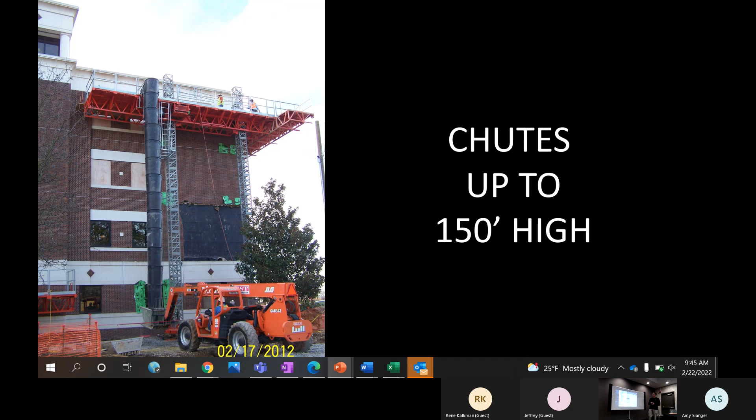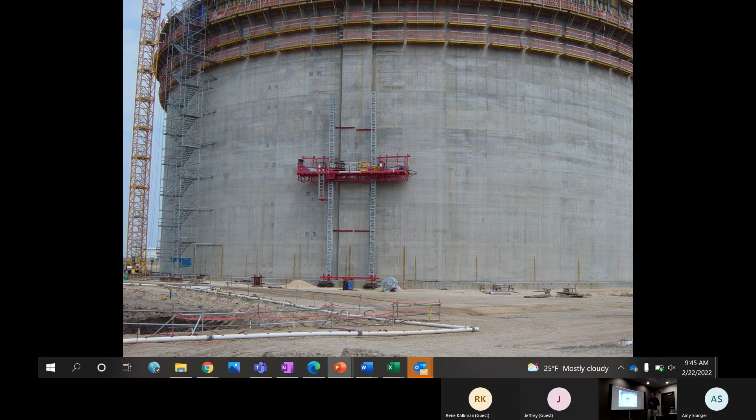We do have chutes available up to 150 feet tall, so if you need to run material down there. On post tension jobs like this one, they pour concrete around the LNG tank so it'll stop a 747 if it hits it. I didn't get to see the field test, but I would have liked to. We actually loaded it down with about 28,000 pounds on it.

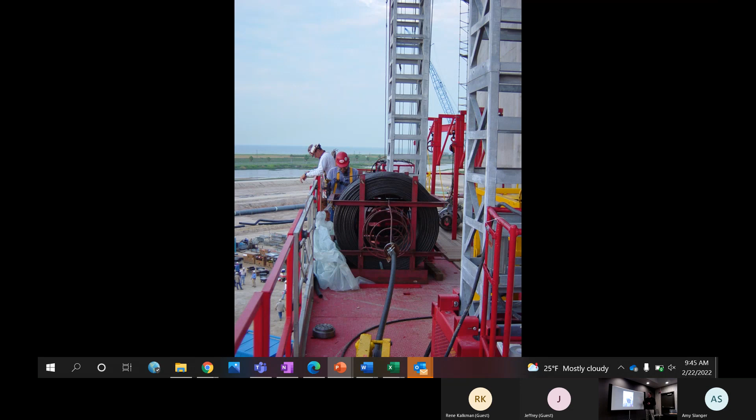So we beefed it up to capacity on that, and we also put the monorail in there so it would assist them in lifting this heavy piece of material to pull, or push, the cable.

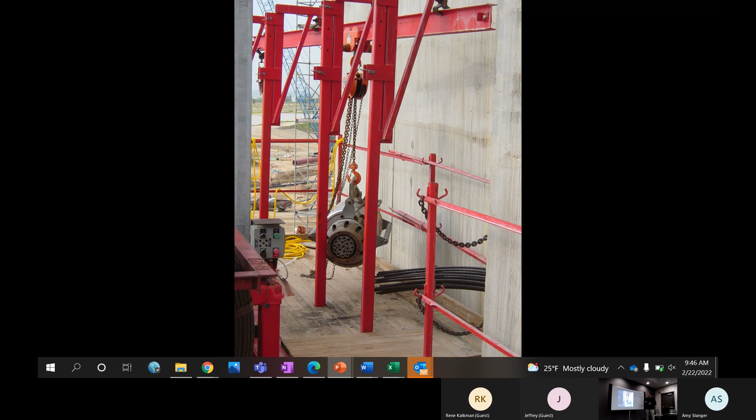We also set concrete forms off of it. Cool thing we're doing now is we're actually ganging concrete forms. I don't know if you guys have seen the form work where they gang them and lift them with a crane, or sometimes they use slip forms. So we pull those off the wall, prep them, raise them with the scaffold, and put them back on the wall.

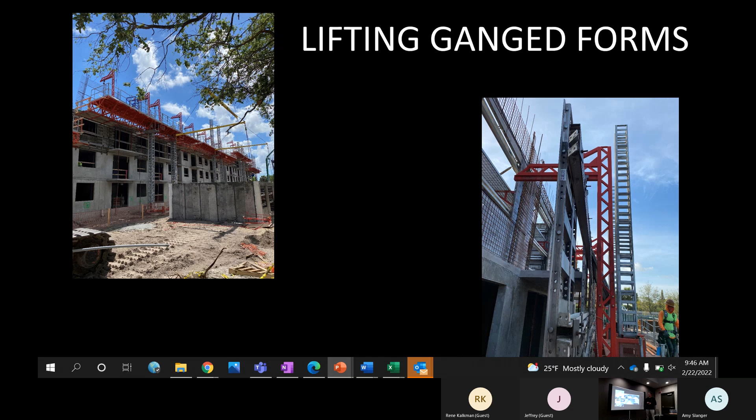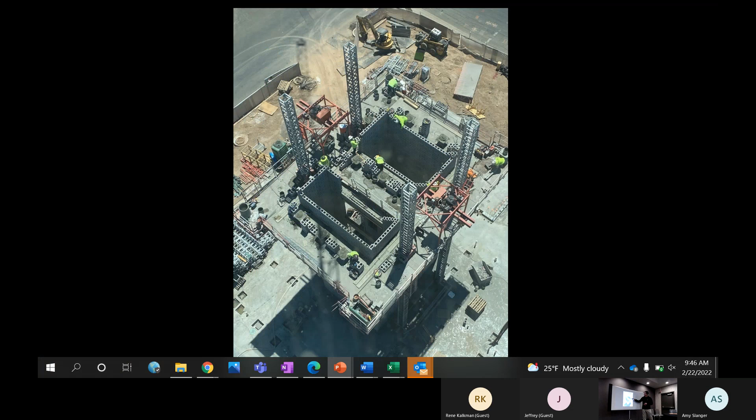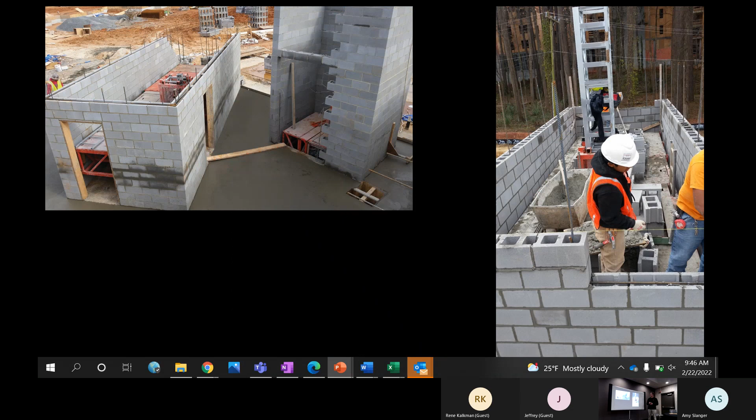Like I said, doing elevator shafts, stairwells, the diamond plate all the way around is a great work platform. One right here, we put one unit on this side, one unit on that side. We had 3 bridges, so we're covering 8 walls with 2 machines. With a 2-inch shot, we can roll it through a 3-foot door, go inside elevator shafts and stairwells and stuff like that while the building's going up.

So that's the gist of it. Anybody else got any questions or anything like that?

You said in this particular case the easy scaffold goes up to 550 feet. What if it's higher than that? How do you access it? We can go higher than that, it's just rated for 550 max capacity. So sometimes we have to double up on the towers, beef up the lower towers, reduce the capacity so we're not overloading those towers. The highest mast climber has probably done 1,100 to 1,200 feet, something like that.

The other question I have is, you mentioned the operator or the user has to be factory trained. Is that with all of them? It has to be trained by factory trained personnel. Right, so we do train the trainer. So if I train you, then you can train others.

So would that person have to always be on site? Once you got where the platform needs to be, and you could be there all day or whatever, you don't really need that operator or user to keep going up and down. It just sits there, right? They only need them if they're running up and down.

That's correct, but everybody on that training, everybody gets on our scaffold. You guys can't get on my scaffold without hazard awareness training. So everybody on the scaffold has the hazard awareness, but that's a good point. A lot of times after we train them, we put a sticker on their hard hat so I can look at that operator and tell if he's the one that should be pushing that button.

So if that person isn't around, can people still climb up the towers and do their bricklaying? Yep. Work? Exactly. So that whole user thing, user means operator, is what we consider our user training, somebody that can actually operate it, not somebody that's just on it.